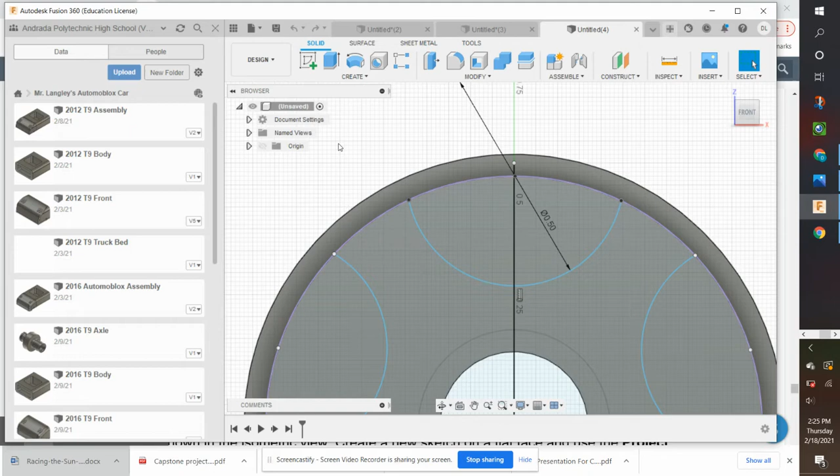Go to a new sketch, create a new file, and we're going to draw a circle. We're actually drawing 4 circles, and I'm going to show you how to use the offset tool. Our first one's going to be 0.440 inches in diameter.

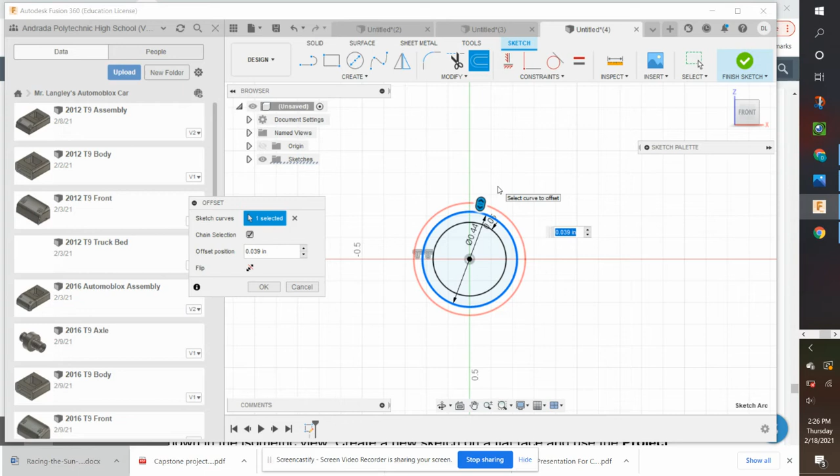Then we're going to use the offset tool and click on our circle. We're going to go inward 0.05 inches, so negative 0.05 for this one. Then I'll do another offset of that original circle and go outward 0.35 inches, just like it shows in the picture.

Then we're going to do an offset, and instead of the outside circle, I'm going to use that same original circle again. I'll go 0.35 and show you that you can actually add and subtract right within the program, so 0.35 plus 0.05 to make that full outside circle.

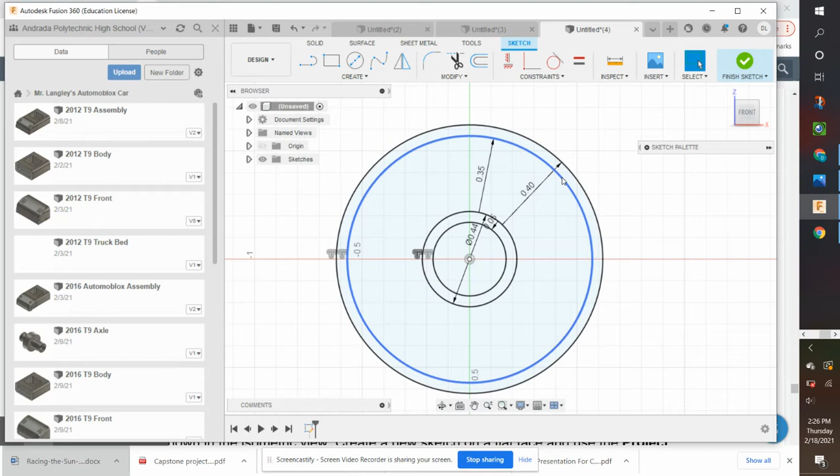So now we have our 4 circles. We're going to finish sketch, then extrude the smallest discs there, and those are going to be 0.57 inches. Now we have the start of our wheel.

Then we're going to start a new sketch. Nope, I lied, we're not going to start a new sketch. I'm going to go back. We're actually going to just use our previous sketch.

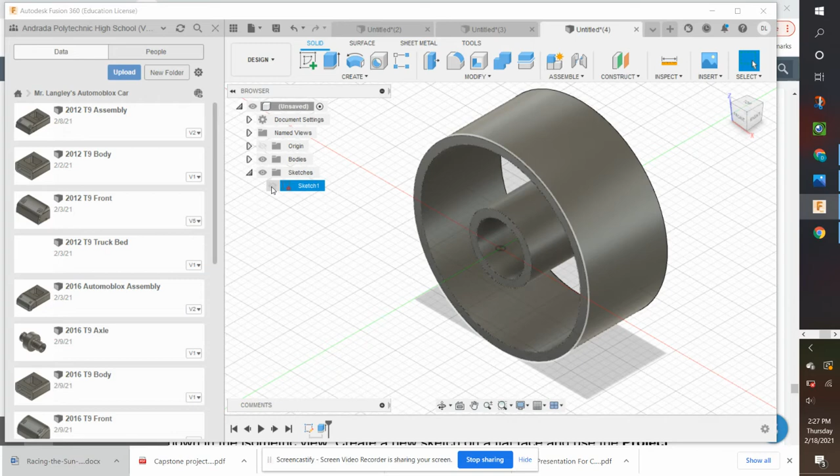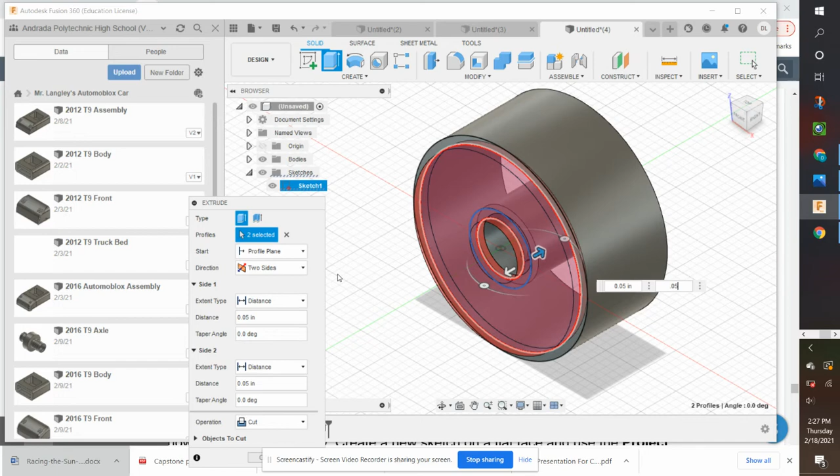If you go down to sketches and click the little eye icon to show it, we can extrude this larger disc plus this inner disc right here, extruding in 2 directions. We're going to do 2 sides, you can also do symmetric, and we're going to do 0.05 each direction. So 0.05, then tab over 0.05 inches again, and instead of joining it, we're going to do cut and hit OK. Now we have our section that we're going to cut out to make the rim of our wheel.

Next, we're going to start a new sketch on that surface. One thing you really want to do here is project geometry. Project the geometry of this circle or the entire disc right here; it doesn't matter either way.

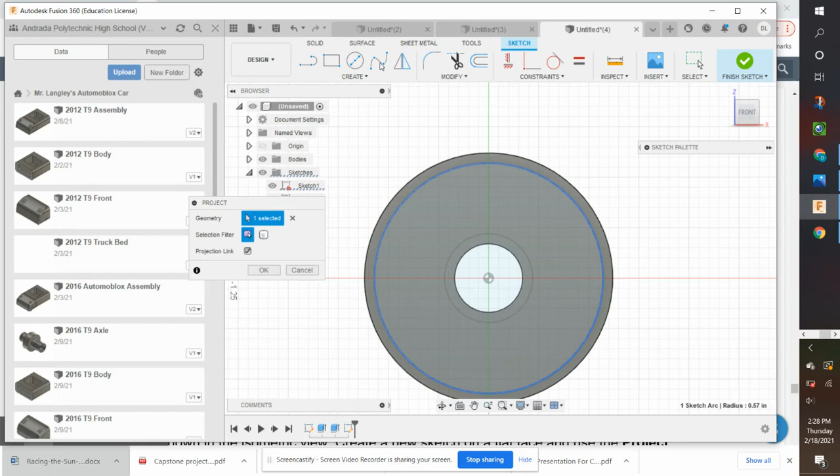What I also suggest is drawing a line from really anywhere here, but it just snaps right to the axis up above and down here. You can go all the way to the center, it doesn't matter, but drawing a line will help you with the intersection we need.

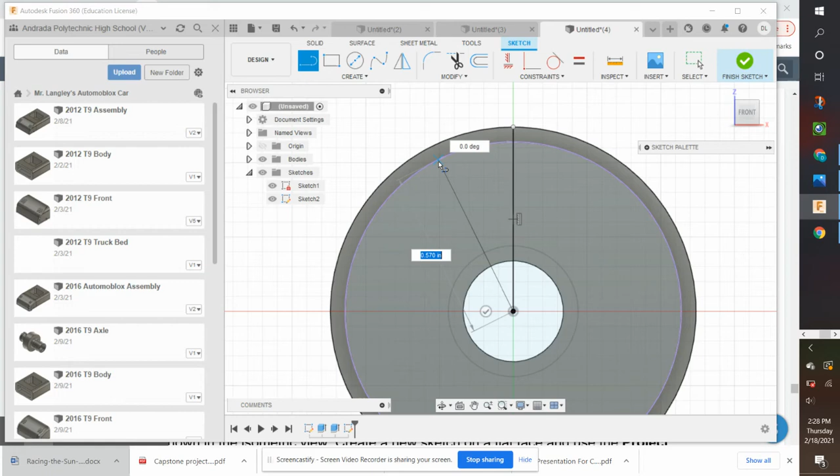Now we're going to draw a circle. We want the center point at the intersection of that line we drew, overlapping the vertical axis and the circle. We want this to be not 0.25 inches, but 0.5 inches in diameter — it actually shows the radius in the picture on Schoology.

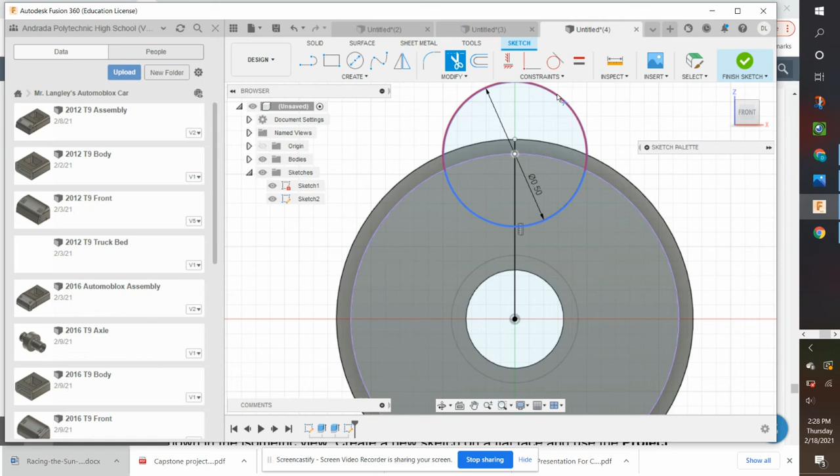Now that we have that, we can trim out the parts that we don't need. We can trim this out, trim out that line, and now we have that portion. We can actually trim out this line too. Before we finish the sketch, we're going to do a circular pattern.

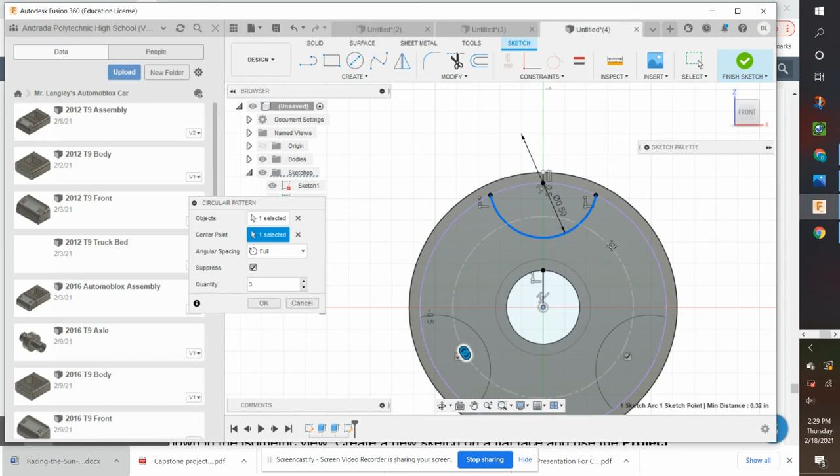We're going to select this to do our circular pattern with, go over to the side panel, go to center point, add that selection, and select the center of the circle. Now it's going to rotate it around — 3 times is the default, 3 equal ways in a full circle — but we actually want 5 to make our rim. Once you click OK, we have those cutouts.

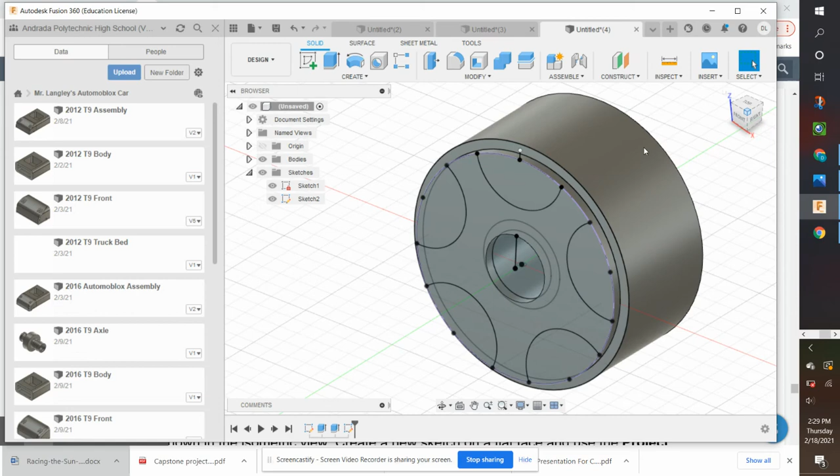Because we have that projected circle on the outside — I think it's in purple right now — when we finish the sketch, we can actually have those as full enclosures. When we go to extrude, we should be able to select each of those really easily. Sometimes it's really hard to select those and you have to be careful about where you're clicking. Then we're going to cut it all the way through, and there's your end result of the wheel.

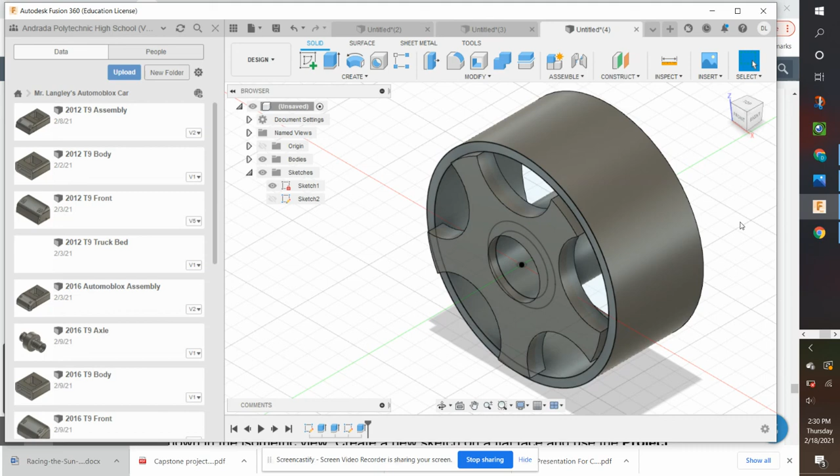I'm going to show you, because now I see that overlap, which is good, because if we were to 3D print this, we would have it very secure. In the next video, I'll show you how to do the fillets in a part 2, but this is the end result. If you wanted to screenshot this, you would be done. Thank you.